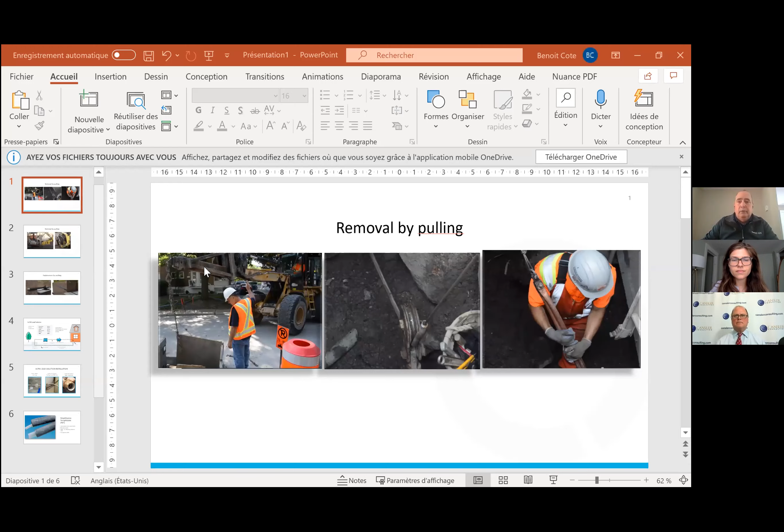One of the major things, and one of the most common ways to deal with lead service lines typically nowadays, and a lot of construction companies will use this, is basically pulling. So we want to pull the lead service line out of the ground, sometimes using heavy equipment. You'll be digging a hole either at the water main or at the curb stop, and through that hole you'll be using heavy winches and pulling that lead pipe out of the ground. This is what you can see in the pictures right there.

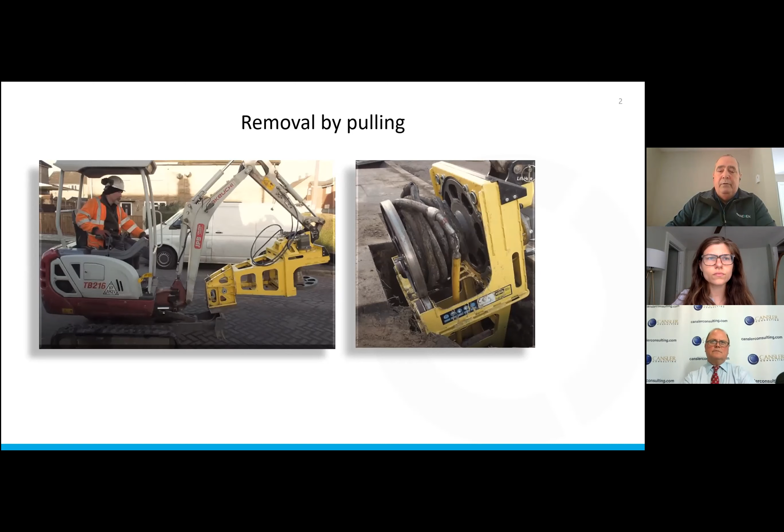Another method that we've used to some degree is molling, so pneumatic molling or hydraulic molling. Molling basically involves pushing a rod into the ground and creating a small tunnel, in which you'll be pulling in a brand new pipe, either plastic pipe most of the time or copper pipe in some areas where it's specified.

A big disadvantage of molling is that you can't really control the mole all the time. So if it hits a rock, it's going to go in a different direction. Especially if you have other utilities between the point of entry and the area you want to replace the lead pipe, you could definitely hit those utilities. You certainly do not want to hit a gas line or communication cables, for instance. So molling is a good trenchless method, but it has a lot of limitations that we need to deal with.

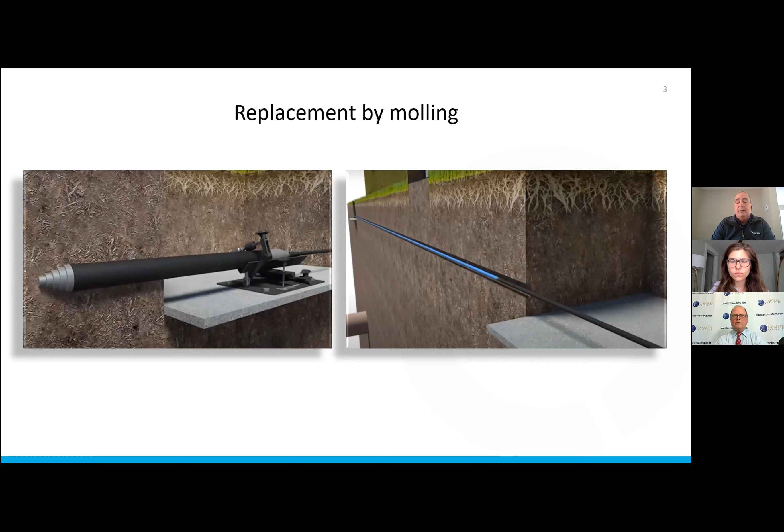So what we've come up with in our ALTRA Lead solution is basically rebuilding a brand new water pipe inside the existing lead pipe. The way it's done is it uses very small, compact equipment. We'll have an access point most of the time at the curb stop, and from the curb stop we'll go directly into the house. We'll have removed the meter inside the house, and we'll be pulling a small piece of plastic pipe, PET, polyethylene terephthalate, inside the existing lead service line, and we'll inflate that PET pipe to the size of the existing lead service line.

All of that can be done quickly. It has very little disturbance for the homeowner and very little disturbance for the community. Working efficiently with a couple of crews, you can certainly do quite a few lead service lines in a day. So this is the method that we've come up with, and we've started installing it in different areas, and it's working out very, very nicely.

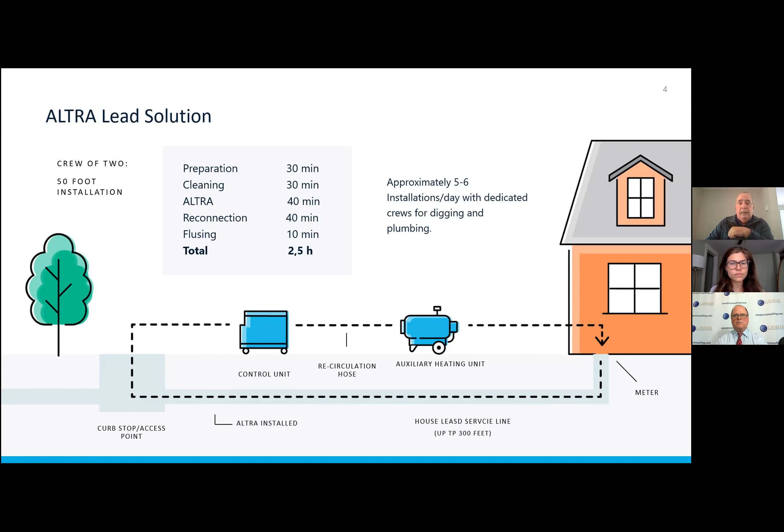So on average, we'll be pulling roughly 50 to 100 feet into an existing lead service line, but we can certainly pull up to 300 feet, which would cover most lead service lines that go into a house.

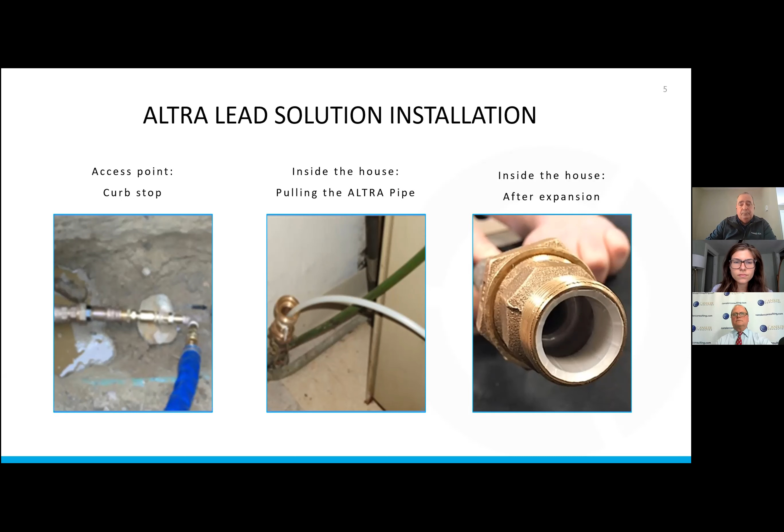So just to give you an idea of how it works, some pictures: completely on the left is the curb stop excavation, so a very small hole that needs to be dug up. We take out the curb stop, and this becomes our access point. Once inside the house, we're basically pulling the PET pipe inside the existing one, and then we'll reconnect directly inside the house once inflated. So it's a very simple installation, and a lot of plumbers can actually do this.

And I mentioned that we use PET. PET is basically the exact same polymer that is being used for water bottles.

PET has also been used in the medical industry, for instance, to make different types of implants that are made with polyethylene terephthalate. So it's very stable, a very stable material. It will resist water that contains a little bit of chlorine, because we know drinking water does contain a little bit of chlorine.

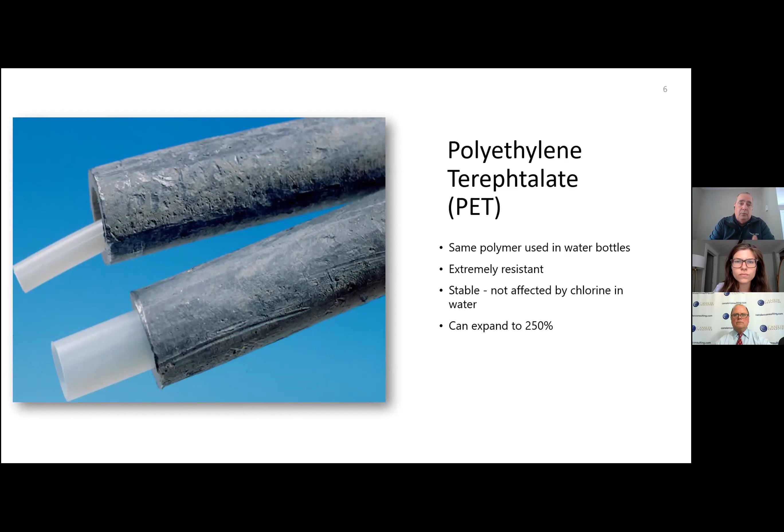It's extremely resistant to other types of products, and resistant to pressure, obviously. And with just one small pull, we can expand it up to 250%, which is a fair amount. And this will still keep holding pressure.

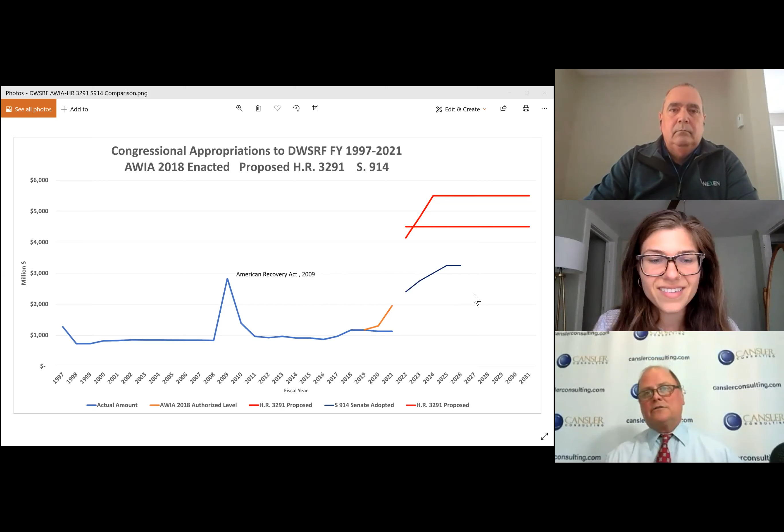As you can see, we haven't seen this level of funding since the American Recovery Act after the Great Recession of 2008. I wanted to show you this because I think it's really important to show just the level of interest in Congress that's coming. I don't want to get too far ahead of myself, but I'm pretty bullish on this infrastructure package passing Congress. That's a really helpful visual, Tim. Thank you, and surprising, honestly.

So we'll get started on some of the audience questions, starting with Ben. We learned that there's no dollar cost to the homeowner, but time is also a cost in terms of disruption. Can you talk about the relative installation speed and how that relates to the other mitigation options? Yes, that's a good question.

So there's two scenarios to look at. There's what I call the one-off scenario, basically where you're going to one specific address, one house, and doing the lead service line replacement. In this scenario specifically, you can replace the lead service line within the same day using trenchless technology.

You would be digging up a small access hole in the morning, then shut off the water to the house for approximately 2.5 hours. Within that time, you've basically put in a new pipe instead of the lead pipe going to the house, and then spend a little bit of time backfilling the small excavation. So all of that can be done in one day when you're looking at a one-off situation where you only have one place to do.